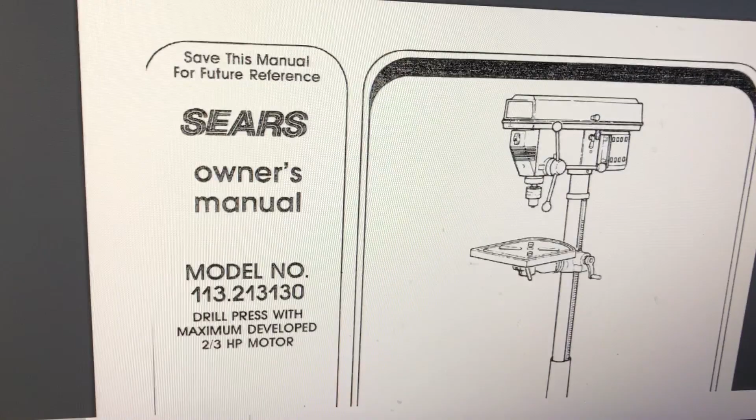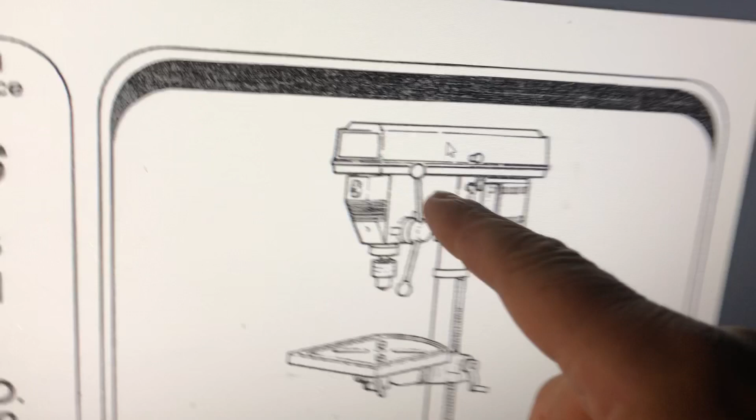Okay, my friend Rob, the friend of mine that rides the motorcycles with us, he went in my shop yesterday and he found the model number on this. Of all places, it's on the end of this motor head here, between the motor and the head. And I looked everywhere but there. Anyway, he found the model number and I found the owner's manual.

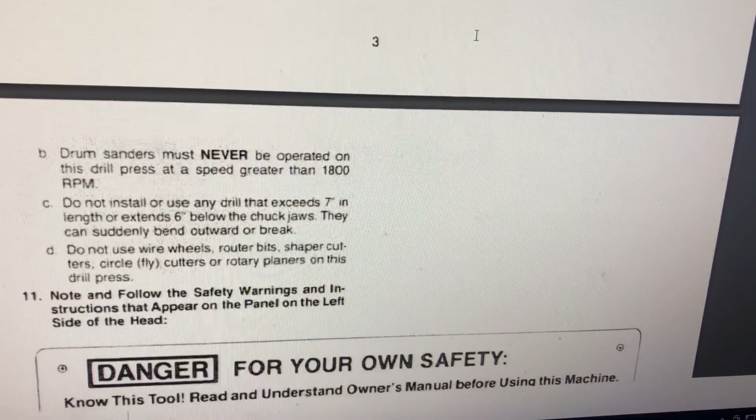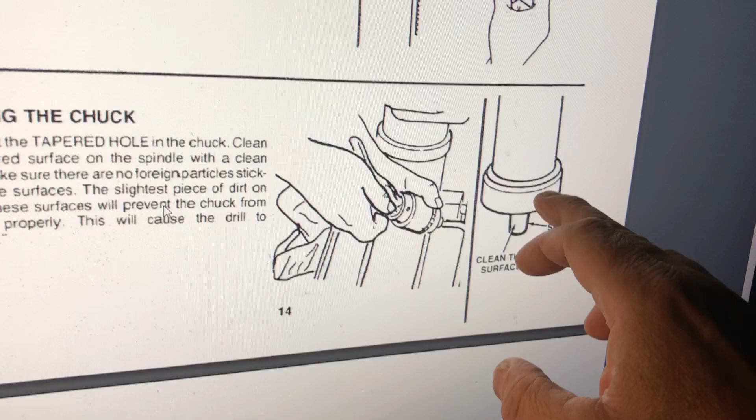So maybe this will tell me how to remove the chuck and add a new chuck. So let's see, I'll look through here and see if I can find it. All right, this is what I remembered it being. There is no threaded collar. There is a collar here, but it doesn't thread out. As a matter of fact, it's got this indentation that prevents it from moving. So I suspect it holds a bearing in there. Actually, I'm pretty sure it holds a bearing in there.

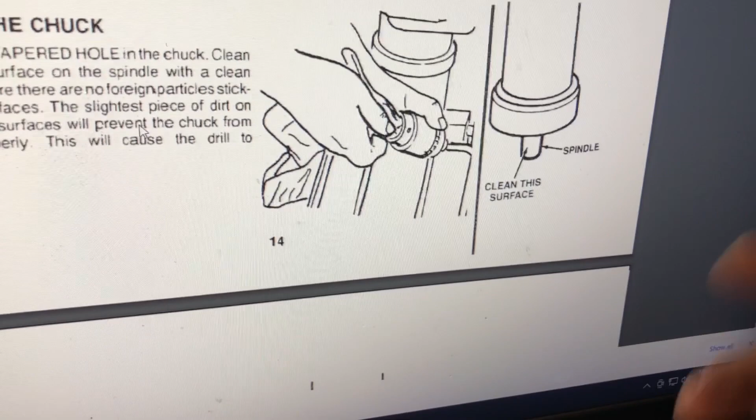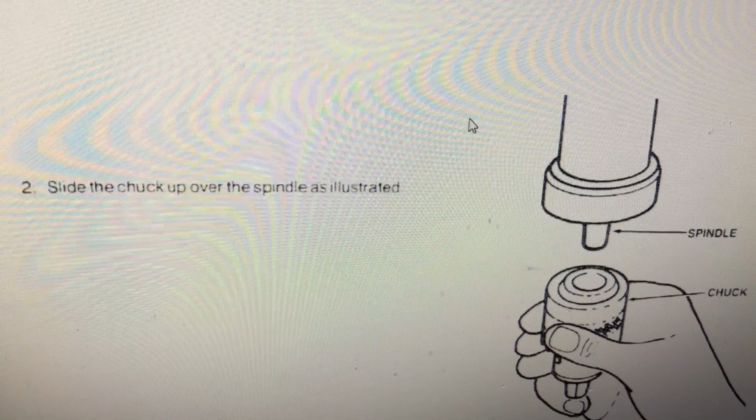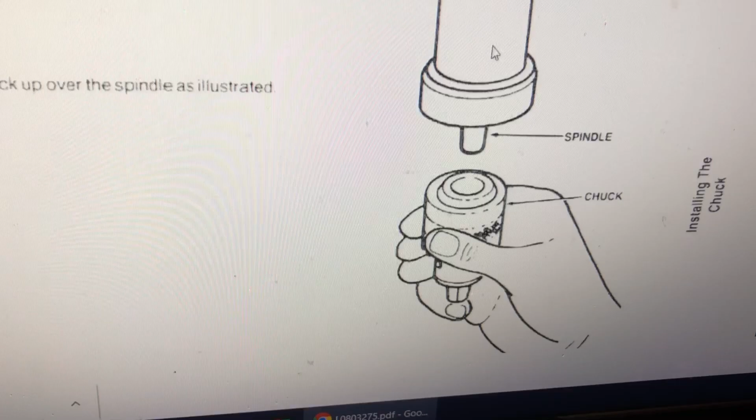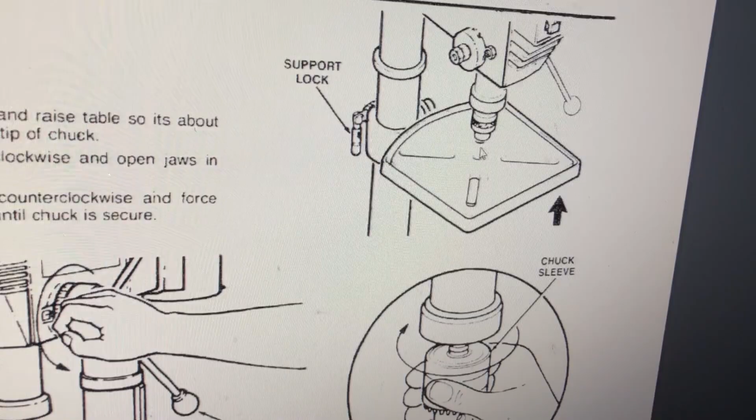So this is absolutely a tapered spindle. And the process to get it on is what I remembered. This has been 25 years ago that I put that spindle on, that chuck on there. It's a tapered spindle, and you put it on there, and you open this up where the jaws come up inside the chuck. And then you give it a good rap with a mallet, or you push it down onto the table like what they're telling you to do here. And what I did was put a 2x4 underneath it and then give it a good rap with a sledgehammer. Not sledgehammer, but a mild hammer.

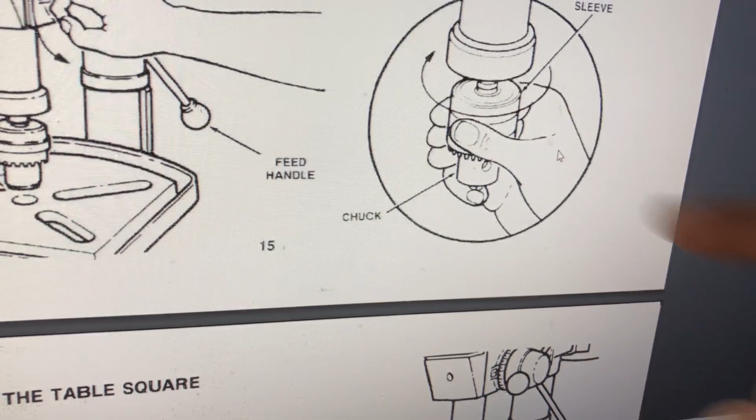This should come off with some side-to-side tapping. What I'm going to do is saturate it with some oil, some break-free something. I'll soak it down and I'll start tapping it on the sides, and then I'll go from there. All right, but at least I have the manual.

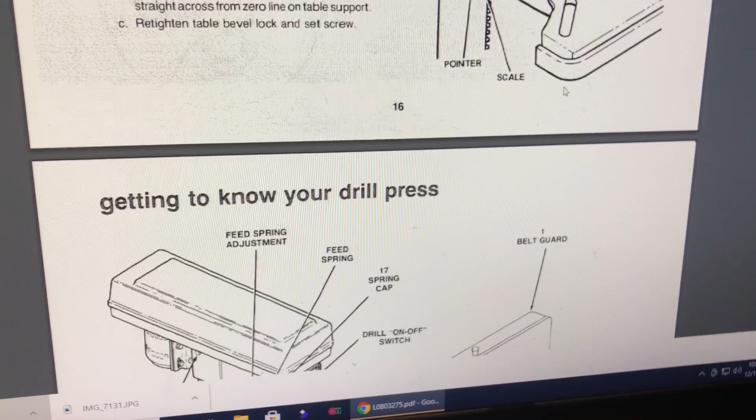All right, let me start from the beginning, because first let me move you a little bit closer.

Okay, here's what's happening. This chuck is bad. I have another chuck that's a much better chuck, but this chuck has not wanted to come off, and I've tried everything, including an air hammer with a chisel in it, trying to get it off.

Now, a friend of mine, Rob, did find the serial number on this, and it was in the back here, behind the motor on the back end of this machine. Really weird place, and the one place I didn't look. So I got online and I found the owner's manual, and sure enough, it is a taper. It's not a taper that fits in, it's the taper goes from...

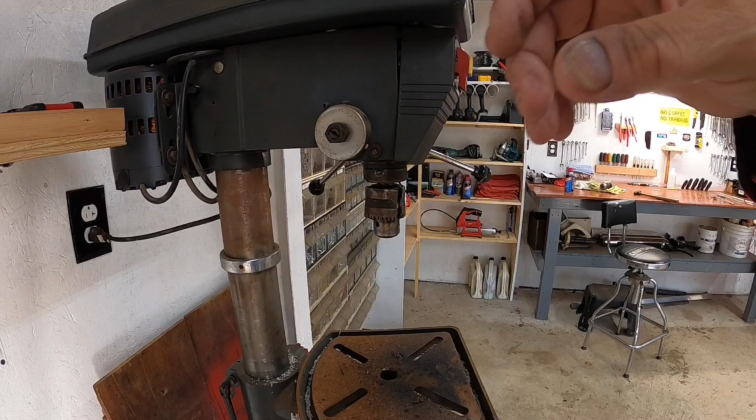Okay, the screen went off. The taper goes from way up here, it's splined, and then the taper comes down here. So there's no change in the taper out. It fits into this chuck, and the chuck has got to come down.

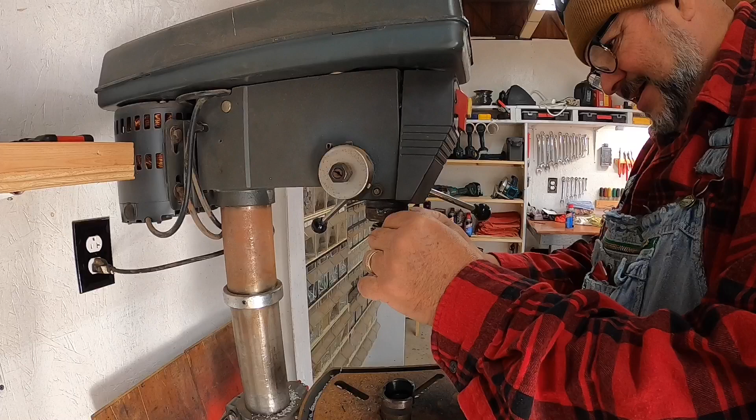So what I've done is I took my cutoff wheel, my angle grinder with a cutoff wheel, and cut this, and I'm fixing to take this apart, and I'm probably going to heat this up with my torch.

I'm not going to go crazy heating it up, but let me get some of this out of my way and get my torch over here. I haven't used my torch in about 4 years. So let me crack this open. Oh crap. There we go.

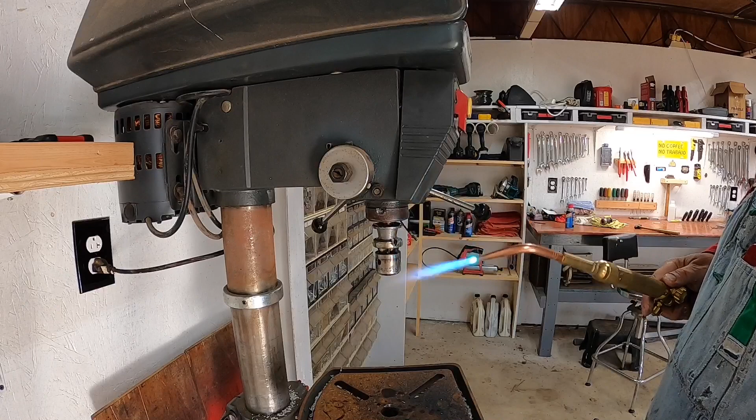I don't know that this is going to work, but it's sort of like my last resort. And there's a bearing up above it, so I don't want to get this thing too awful hot.

And what I'm hoping to do with the torch is expand the metal on the outside enough where I can knock this off of the taper.

All right, I'm fixing to give that a try, so stand back.

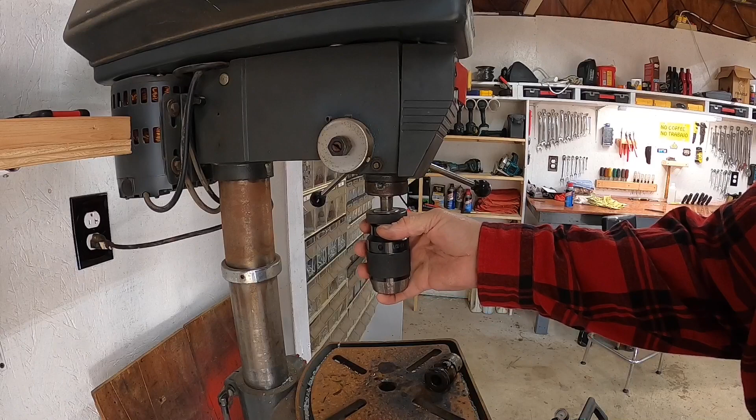All right, here's the old one, the old taper that come out of this chuck. And I just tapped on it a couple of times and it popped right out. So I'm gonna let this cool down. And then I'm gonna slide this up on here, and I'm gonna get a 2x4 under here and hammer this up on there really good. So let me shut you off and give this about 10 minutes to cool down, and we'll be right back.

All right, it's cooled to the touch. And now I'm going to take some steel wool. I'm going to clean this taper off.

All right, here's the moment of truth. And this is a 5/8 chuck. My other chuck was a 1/2 inch, it would only take a 1/2 inch shank. So this is going to be much better all the way around, unless I drop it.

All right, let me just give it a love tap here. All right. One more. Okay, we are good to go.

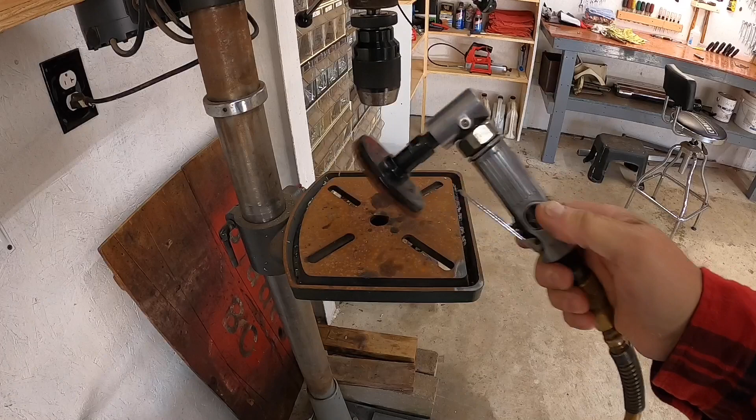All right, I'm going to clean this table up a little bit. And what I've got is a Scotch-Brite pad on my air grinder. And I got a really small, it's not a tiny compressor, it's like a mid-sized compressor. I don't know if it's enough to run this. If it's not, I'm just going to get my palm sander out. So let's just see.

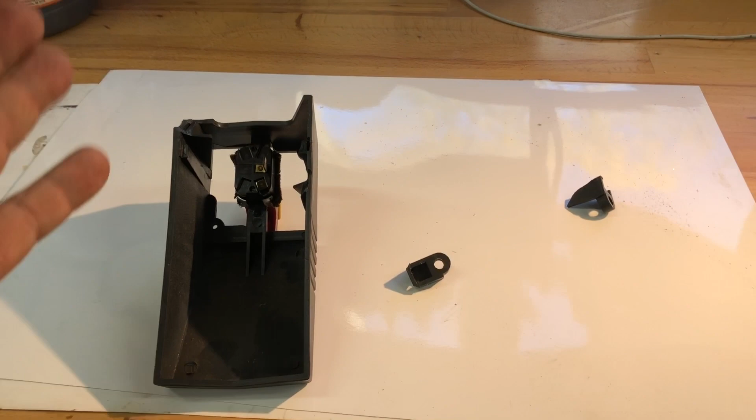Now we're done. Well, this is the switch cover. I took it off, I brought it into my knife shop here. And where is my super glue? Why is it every time you need super glue, you can't find it?

So I'm going to stop, I'm going to run up to the store, get some super glue, and glue these little tabs back on here. So this drill press will be back to as near as new as I can get it. And I'm going to clean the rust off of that table too.

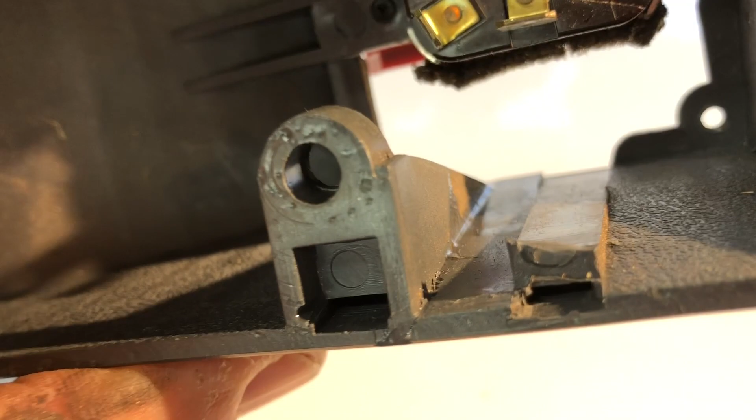So be right back. All right, Bev had some super glue. So I'm going to give these about 20, 30 minutes to dry. And the drill press project, well, besides cleaning the rust off the table, it will be done.